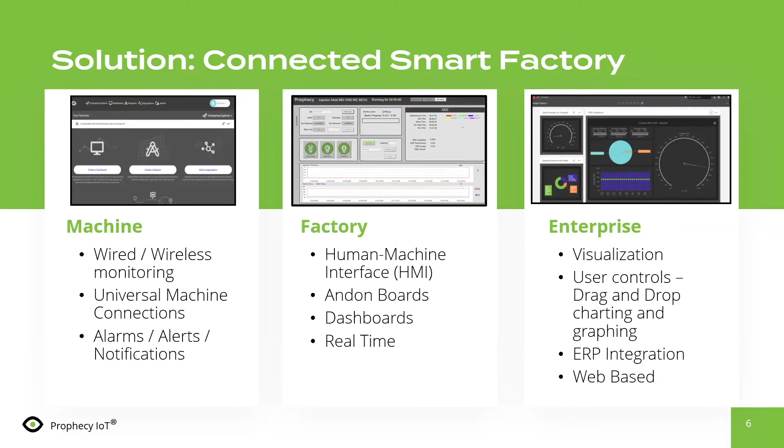applications. And then we're going to talk about the enterprise, how we can look at visualization, how can we know where we have an issue, where do we focus, where do we manage by exception, those types of things. That's all part of the journey and the discussion we're going to have today. So as we start down this journey, there's really two paths that companies can take to get a quick time to value.

The very simple one, a lot of times with the machines that you purchase, you'll find that they have some basic machine monitoring. This is software that's usually limited to the platform that the machine builder gives you, but it's some type of software that allows you to basically do some monitoring. That monitoring will let you know maybe when a key fault has occurred or a key breakpoint has gone off on the machine, and we know it's time to do some type of preventative maintenance or repair.

The challenge with most of those platforms is they really don't extend across all the other machines that are in the factory. Well, that's where our approach is different. We want to talk to all the machines, not just some of the machines. So look at machine monitoring as a way that we can get the machines connected up to the manufacturing network. And by doing so, now we can start to look at machine monitoring in a very simple and pragmatic way.

How do we look at those key failure points on a given machine and then know, one, obviously when something happens, but then also set up capabilities so that we maybe can get some predictive nature to know that something's about to happen so that we can prevent the downtime and maybe prevent the scrap.

And then the second phase we're going to talk about is more about factory automation. And this is where, based on what I would call the setup of the machine monitoring, we now start to build upon that, and we start to look and maybe get connected to your ERP system so that we can start to really look to revolutionize the manufacturing process.

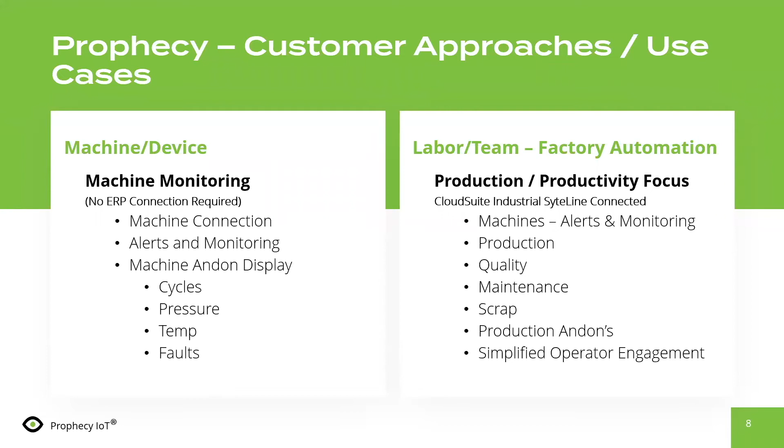Okay, so those are the two approaches and use cases we see that our customers are looking to deploy. So on this journey, what's important and how do we do this? Well, first and foremost, all the various injection mold machines, compression mold, blow mold machines, the machine builders put a lot of data on there that we can get access to. Now, if the newer machines have a PLC, that's great. But the good news is there's a lot of data there. The bad news is that was there for the machine builder's purposes.

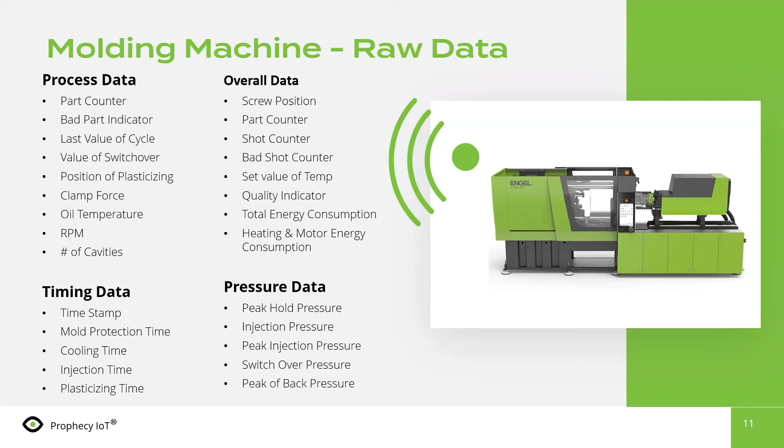So we want to be able to get to the data, but the key is not only getting to that data on the machine, it's then how we start to put that in context and transform that data so we can take action on it. So we compartmentalize that data within the Prophecy application, things that are related to performance.

Some things will be there for maintenance and quality, efficiency, for example. Everybody would love to know uptime and downtime related to their key assets, getting to real true efficiency. A lot of times we start out with the best of intentions. We have an 8-hour shift, and the next thing you know, we're down to like an hour and a half of true productivity. Well, how do we get there, right?

That's the adage of we want to try to get in and do the root cause analysis, but a lot of times the data is not there to really support that effort. That's the path that we're going to change. So with this transformation, getting this data, we're really converting that into action and placing it in context with the manufacturing that we're doing, the parts that we're running, the type of quality that we expect, so that we can simplify the operator engagement.

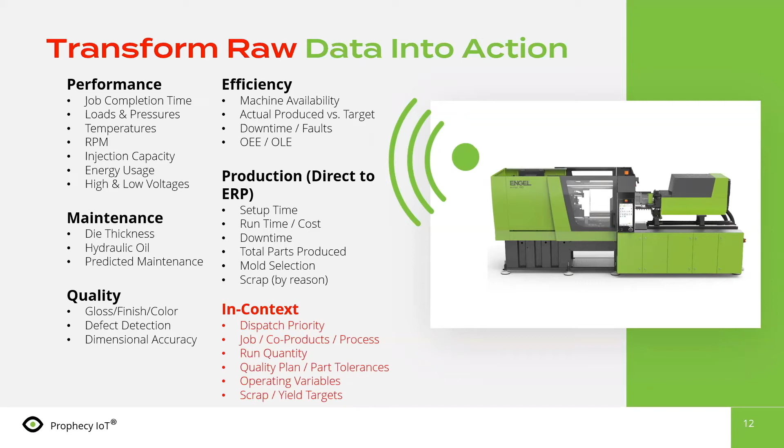So as I mentioned, the first step is around the machine monitoring. This is where we need to set up the basics. The application comes out of the box with a lot of capabilities ready to go. So as we have temperature, pressure, voltage, other types of things that are going to be the key failure points on the machine, we can set those up, and then we start to monitor those so that we have high and low limits of alerting, if you will, and that can be sent off to an email. It can be sent off to a text message. It can be displayed on one of the displays throughout the factory.

We also have the ability to monitor something called rate of change. So this is where if I have a pressure that would go up or go down exponentially based on a certain rate, then that may indicate a future failure. So think of this as almost like a basic machine learning or AI type of capability that's in the product. There again, we don't want to have to sit and watch the data to look for the issue. We set it up and allow the automatic alerting, the managed by exception in the application, to do that automatically.

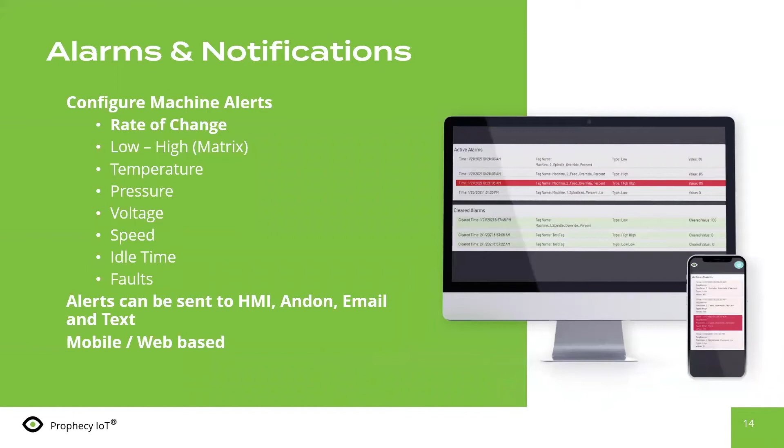Now, the good news is with those connections, we can now monitor visually throughout the factory. So we use the term Andon board. A lot of companies have this as like a spreadsheet or maybe a whiteboard called a grease board out on the factory floor, where we have something that's just visualizing how the machines are running and how we're performing. It may show upper and lower limits. It may show that maybe we've triggered an upcoming preventative maintenance cycle that would need to be performed.

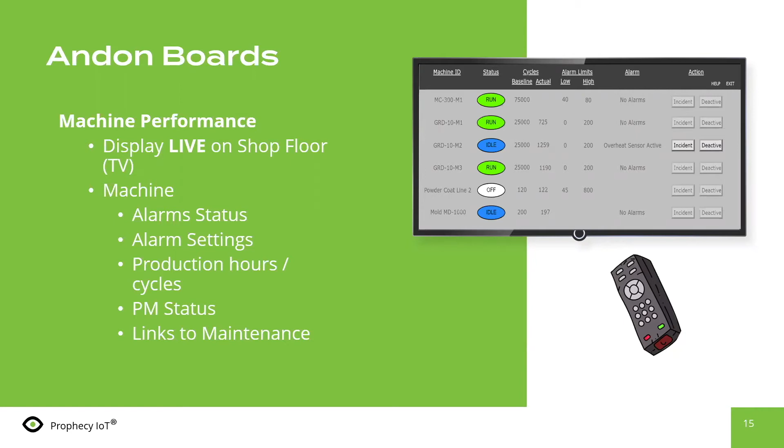A lot of companies with preventative maintenance, it's just really the best guess. I think I should do maybe every 6 months, and I change filters and I change certain things within the machine just as a normal protocol. Well, we can enhance that because now we can bring number of cycles, hours run, etc., into the matrix so that we can be a little smarter about the calculations of when and how we would perform a preventative maintenance action.

Now this leads us to our second phase, which is factory automation. This is the phase where we combine the key machine data along with the key manufacturing specification data. A lot of times this data is housed in your ERP system. We've got a lot of experience with a couple of different ERPs, and within this, there's usually a manufacturing specification, maybe a work order, maybe a bill of manufacture, but it's within there that the specifications need to be combined with key machine data so that an operator can effectively produce a high quality product according to specifications and time constraints potentially.

So as I mentioned, you could have a lot of operator interaction depending on the type of industry that you're in, or you might have environments where we just set up a certain injection mold machine and it's going to run unattended for maybe 2, 3, 4 days at a time. And we just want to monitor that from afar. And then behind the scenes, we record information related to that production coming off the machine with very little to no operator interaction. So the good news is there's not one size that fits all here. We'll talk about how we design these HMIs built to your environment so that we can really dial it into your production process.

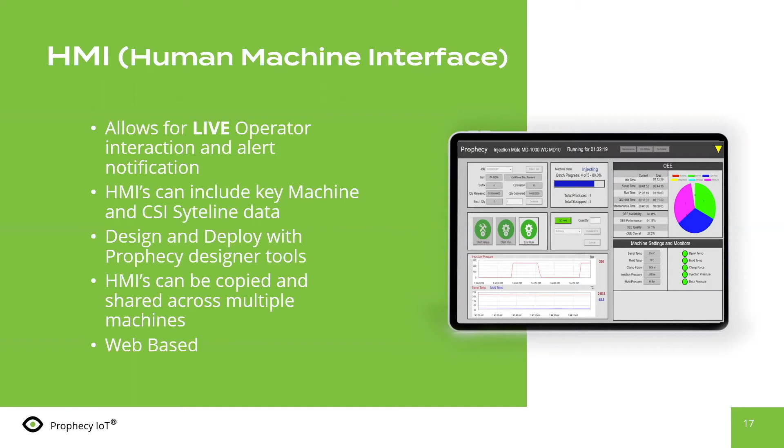The key is by doing that, we also now can impact the ecosystem in which we know that production and the operators have to live in. A lot of times they get their production either from a visual dispatch list that may be deployed from production control, or it may come from the system itself, which might be an online dispatch list.

Well, we can display that information on the HMI so it keeps the operator from having to ever leave the station. In there, they may be able to select production or the part that they're going to be producing, get all the specifications, and then based on machine and production activity, we can now perform in an automated fashion all the transactions necessary for that ERP platform behind the scenes. We'll see an example. We'll talk about that.

But this gives companies an opportunity to where before everything was really controlled by the operator. They either wrote it down or they went and keyed it in another system. We can take away all those added steps and all that, what I would call non-value adding activity, which can make you very lean. And we can do that by a simplified HMI that is multifunctional.

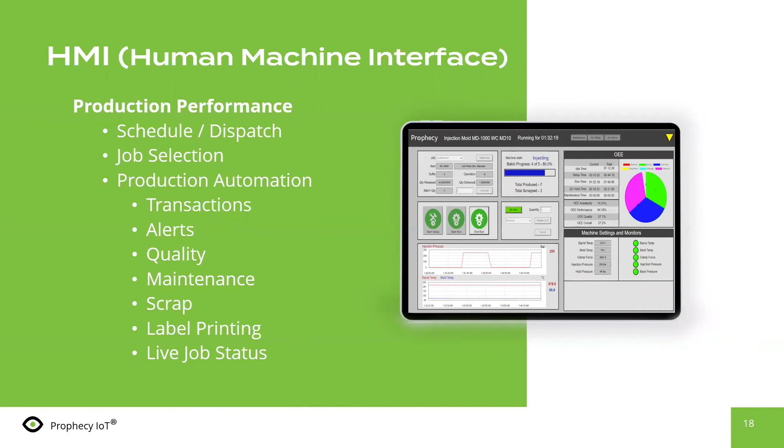In the same light, we want to see that our groups of machines, maybe the injection mold machines or the compression molds or the blow film molds, the group, how are they performing? Maybe we want to see this on a TV, so you can display any and all of the visualizations that we create in Prophecy on just a normal TV. It's a directed URL. You put something in like a little Raspberry Pi, and now you have a live feed showing exactly the shop performance of any key area of the shop.

So teams will know how they're doing. This can be important so that you can start to drive people to where we have an issue. I may have a down situation, etc. And it's a very interactive way that now you can monitor team performance so that everyone on the factory floor knows what's going on and where we may need to focus effort or attention.

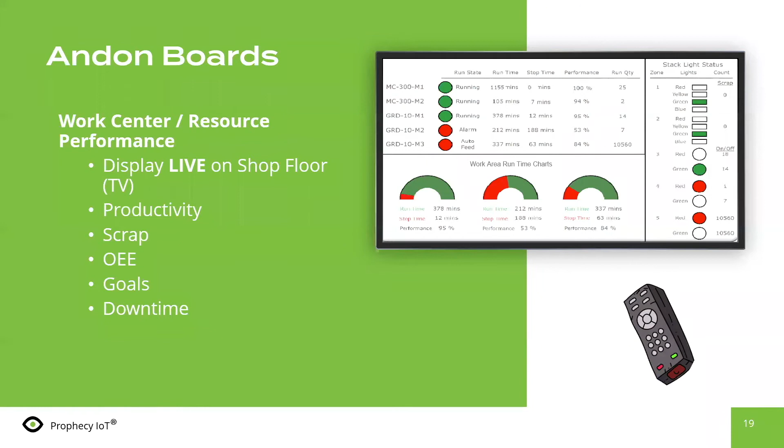So with that, let's talk about the little example that we want to do today. And I'll be helped out by my colleague Sean here. But let me set the stage of the little example. So in our example, we have a molded part that's actually a cell phone skin. It's probably not important, but it's just an injection molded part. And that part in our ERP system basically has 3 parts. So think of it as a 3-cavity mold that's compressing out this component.

We're going to be using a certain type of resin. Within there, we've required that we're going to have some setup. We know we have a production quantity target that we want to hit. We have some quality that we need to adhere to. As we understand, along the life, you need to know, hey, if we're scrapping out or doing regrind, etc., how do we deal with that? And then invariably, life's not perfect and sometimes things break.

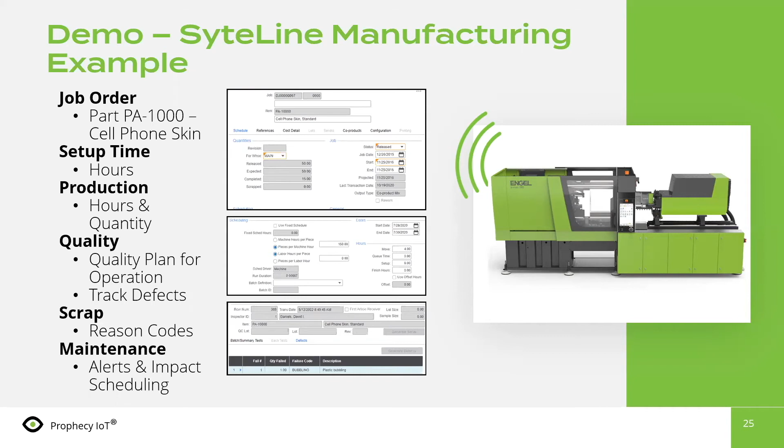So this is our little example, and our little job order that we have in our system is we're going to do 1 injection mold cycle, and from that we're going to get 3 parts from the mold. So with that, I will turn it over to Sean so we can take a look and see an example. Sean, take it away.

Okay. Let me get going here, sharing my screen. Can everybody see my screen okay? Yes, sir.

Okay. So like Ron said, we start out in SyteLine CSI with the job to generate these cell phone skins. Now, normally you would print off some sort of a traveler to send over to the work center to tell the guy what he has to generate, but we're not going to do that. We're going to be able to use our HMI to go right in and find out what jobs have been assigned to the work center that we're working with here.

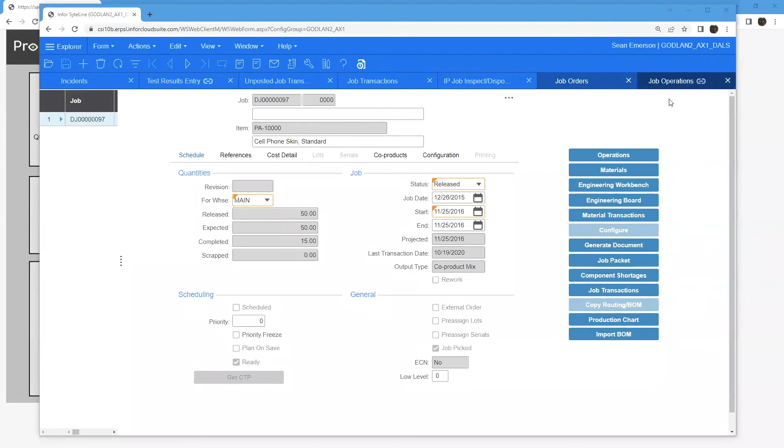And this job operation is going to be assigned to work center MLD 10. And we've got some basic information here that SyteLine will use later with our data to determine how well we're doing.

So we come over here to the actual HMI that we're using here. Real quick tour around this thing. We've got machine settings here that come directly from the machines. We're actually going out and asking, what setting are you using for your barrel temperature, your mold temperature, clamp force, etc. And we're just reporting that here. We don't control your machine from this HMI. That's just a liability issue for us. But with our toolkit, if you wanted to, you could probably get in and provide some controls.

We have some basic monitors here of temperature, just kind of an Andon stack showing whether it's good or not. Up here, we've got our interface for our CSI data that's coming in. Like I say, this would normally come in as a traveler. And I'll show you the rest of it in a little bit. Right now, the machine is offline. So let's go online here and connect the machine up.

You'll notice the temperature right now is pretty low. As soon as we go online, it starts warming up, and we can see our mold temp and our barrel temperatures heating up. As they reach temperature, you see that the Andon indicators are going green, saying that we're ready to go with them.

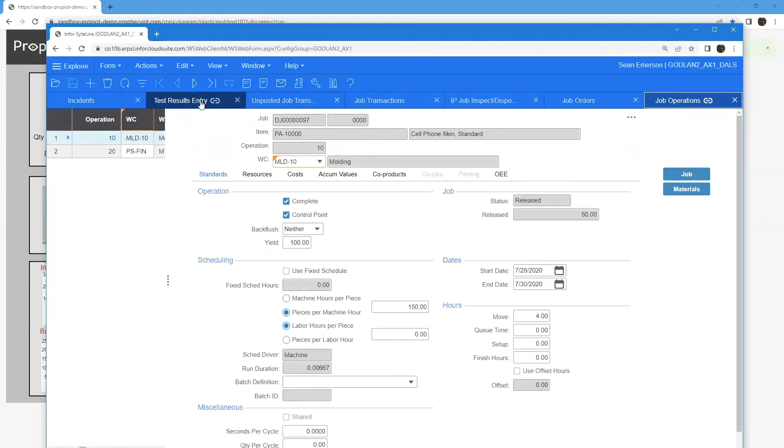And when we hit update, this goes out and conducts a transaction with CSI and actually records that QC results. So if we go over here and we look at the test results and update that, we see here that we've got a quantity failed of 2 of bubbling, and that's just what we put in there. And we see here on this pie chart, we've got 1 good part that we've created and 2 bad parts that have been scrapped. We show our total scrapped as 2.

And it backed off the number of good parts that it created because we want to produce 5 good parts at the end of the day. So we've already scrapped 2. So out of the 3 that we've built, we've scrapped 2. And so it just keeps pressing on here. And you can see that while we were in that QC hold, we had that held for 29 seconds. So that's basically what happens here.

But not everything goes well all the time. Sometimes bad things happen. Suppose you have a catastrophic failure, your clamp hydraulic pressure failed. And boom, we go into a failure mode here. We stop the production processing here. We're showing on our Andon board that we've got failures in clamp force and of course back pressure as a result of that.

And down here we have a message. We've got a clamp hydraulic failure. Do we want to submit a maintenance ticket? And this would then create a maintenance ticket in CSI. So if we went ahead and submitted that, it'll conduct that transaction in CSI, and then should return back to the operations that we're doing here.

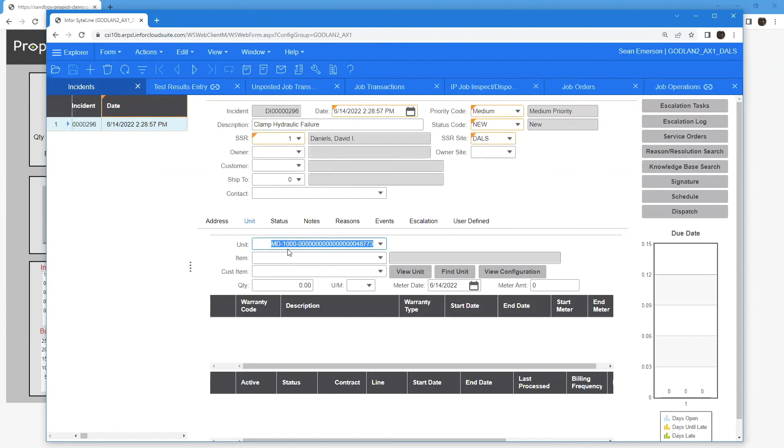And if we go over here, let's take a look. Refreshing. So right here at June 14th at 2:28, we had a clamp hydraulic failure on this unit right here. So that was automatically sent back up to CSI from our operation.

Okay. And for those folks on today that may not be familiar with CloudSuite Industrial or CSI SyteLine, just understand that we do integrate to other ERP applications. So we're just doing this as an example that it is connected to ERP, and that's what Sean is talking about.

Okay. So once we recover from the hydraulic failure there, it should go on and continue. But, you know, maybe this requires, oh, there we go. It's coming up now. And it resumes the job that it was running. Once we complete the run, then we can hit end run, and it'll perform a job transaction back to CSI. So we'll just shut it down at the end of this next cycle here.

Notice that our OEE data is updating for quality, availability, performance, and then overall is just an aggregate of those data. So let's go ahead and hit end run and shut down the job. Okay, this little green flag up here says that we conducted a CSI transaction there.

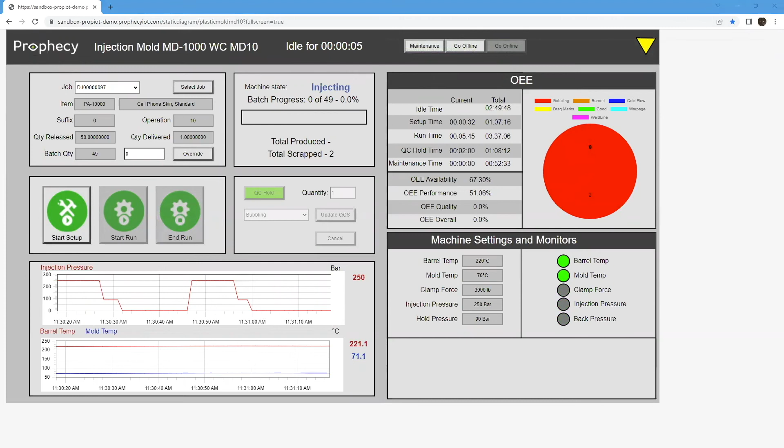So we go into unposted job transactions and we refresh the data. And there we have our job 97. But the unposted job transaction is set up to actually, without you having to go back to CSI, make the entries automatically. So no human interaction is necessary. So unless there's any questions, I'm going to turn this back over to Ron.

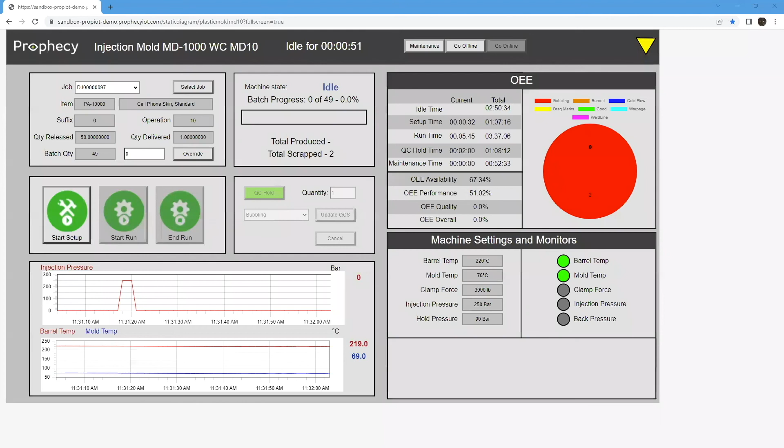Excellent. Thank you, Sean. And the key takeaway there is that we wanted a simplified and unified screen so that for operators that maybe aren't running certain applications all the time, we can mitigate a lot of the cross-training, because the intelligence can be within the HMI itself, try to automate the transactions in the background, and then give an operator an easy way to deal with various disruptions that are going to occur.

The good news is based on your production and your type of process, this is where you can utilize the toolkit in Prophecy that allows us to have the HMI designs based on whether you're doing injection molding, compression molding, blown film molding, etc. And then by having that uniqueness, you can really dial this in so that your operators and your teams have a simplified engagement. And that's kind of the key.

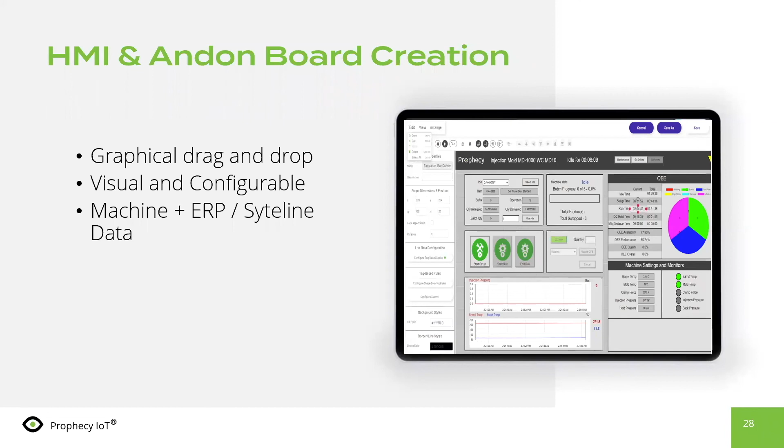We made this so that it's really drag and drop. We made it so that you can utilize state-of-the-art techniques like REST APIs to be able to communicate to your application. And that application can reside, of course, on premise and in the cloud. It really doesn't matter.

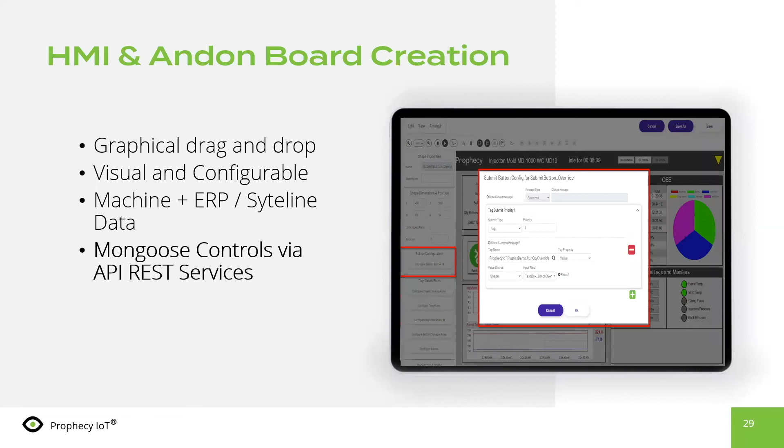So this is where you can kind of just utilize the IoT platform and then embed this into your current ecosystem and your current ERP and your current solutions. If you have analytical tools, for example, you might want us to be able to publish data to that analytical tool. If you have visualizations like within your ERP, you want to have dashboards. You can call any of the Prophecy IoT widgets and place those visually within your environment.

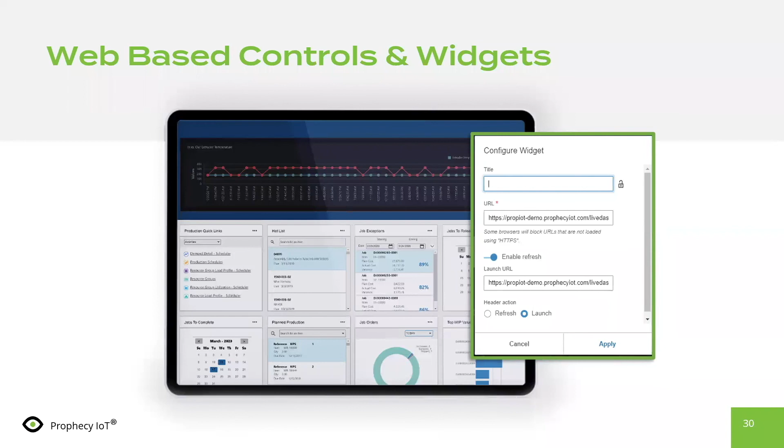And like I mentioned, if you do have an analytics application or you have a data lake, someplace that you want to publish out data that's then going to be used for root cause analysis, we have an automation engine in Prophecy to allow you to aggregate, accumulate, and then push that data out to these other applications. And we realize that everybody's environment, when you look at how you would utilize it and the type of hardware that you would do, it can be unique.

And like I mentioned before, maybe you're doing something a little different in plastics and you need a different looking HMI, something that might be more blow film mold, for example, that gets rolled onto rolls and then cut and put on pallets, etc. The good news is the HMIs can take on the persona of your type of manufacturing, and that's the key.

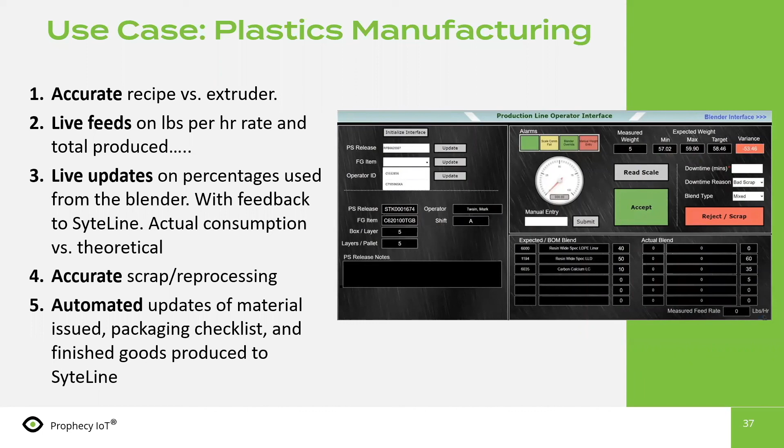You may have hoppers where we need to do some that get blended, and we have weight controls for raw materials. You may have recipes where there's an expected mix that ultimately would get changed when we go on to the extruder, for example, things like that. The good news is it's not one size fits all. This is where we look at your individual situation, the type of manufacturing you're doing, and then our team is very good at helping you dial that in so that you can really start to transform your factory floor into a smart factory.

Other use cases, you may have places where there are machines or manual processes where parts are getting created and things are getting moved. We can do those with all types of sensors and other ways to optimize, everything from line break sensors to cameras to RFID. There's just all types of opportunities in which we can take what were traditionally manual processes, where we had to write down production or maybe try to scan it, and look to optimize that and bring that into the framework of industrial IoT.

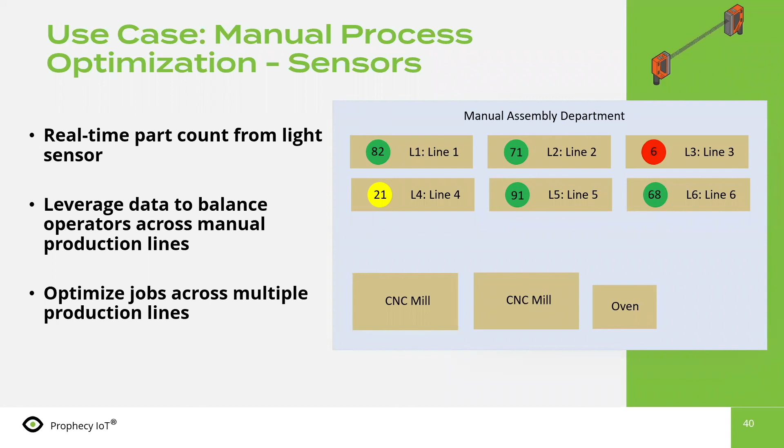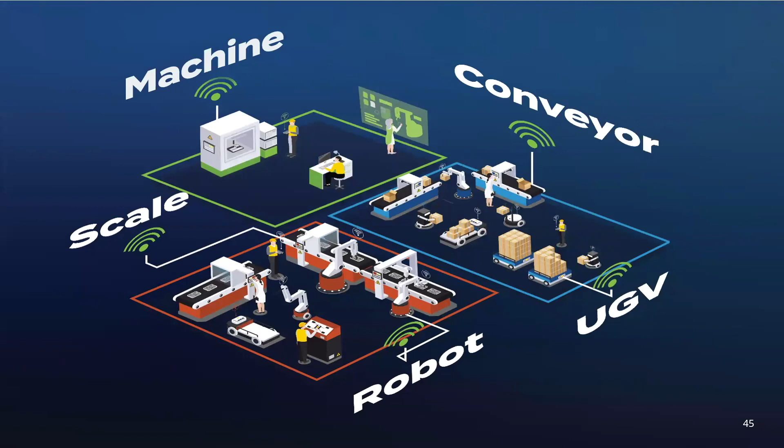So the opportunities are numerous. We know that every plant floor is going to have some uniqueness. You're going to have new machines. You're going to have some older machines. The good news is the smart factory application comes out of the box with all the connectors that you're going to need to talk to all the various machine platforms. We have thousands of connectors and the ability to read those machines up to 10,000 times a second. Not that anyone would want to do that, but in some places high-speed data acquisition can be extremely important.

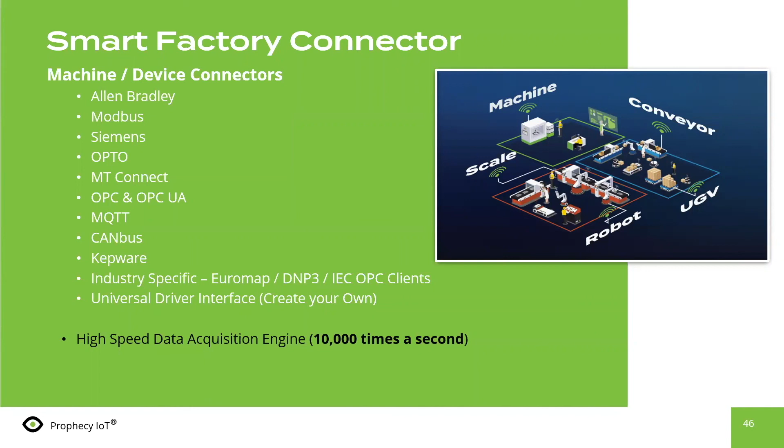So within this environment, regardless of the machines you have, if they are older, then we will utilize a couple of different techniques. Sometimes machines will have a controller and we'll be able to talk to the PLC. In other cases, it may be a little older machine, and within that, we can use some of the more advanced capabilities called an edge device. That's a little small computer that sits within proximity of the machine, and then we can have like a temperature or an injection pressure, voltage. Any and all those can be done through the edge device, and we would not have to hardwire really anything into the machine.

So the good news is this application and its capability really gives our customers and prospects a whole new world of opportunity of how they would look to automate for today and into the future, and bring together a manufacturing network that really enables them to address all those problems that I talked about up front. How we address the margin pressure, everything from the demand spikes to the customer expectations, the worker and skill gaps, and give you the ability to really drive information to your shop floor that will help you today and into the future.